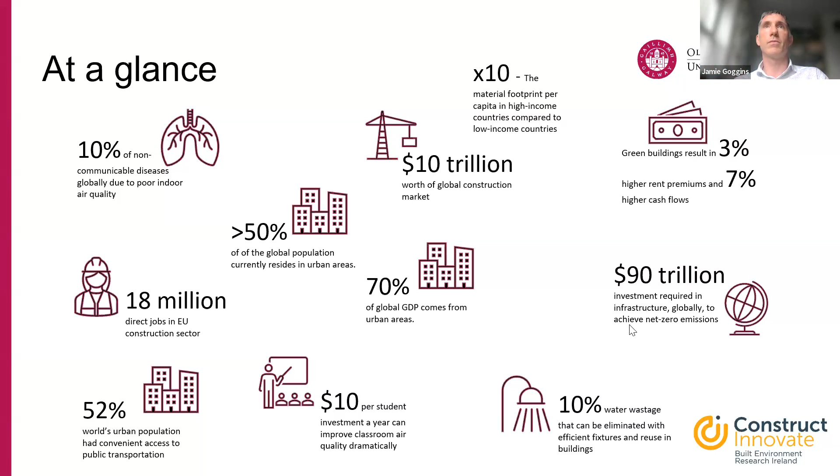Many companies, such as Arup, are telling their own stories through the SDGs. If you look at the Arup sustainability report, you can see how they're showcasing some of the projects they've done, relating them to the SDGs, with the SDG logo shown alongside the specific targets underneath.

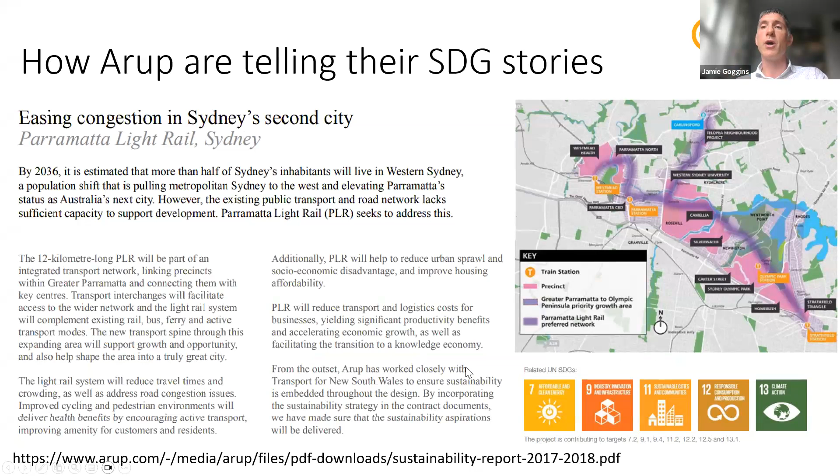It's important that we pick out the targets we're trying to achieve, and that's why I showed you earlier how you might go onto the website to find those targets.

So this is what I think you could think about for your projects, and how your project might be supporting the Sustainable Development Goals.

If I take an example of tidal energy - we do a lot of research in tidal energy within our group - the main Sustainable Development Goal that would support is affordable and clean energy. If we deploy a tidal device or a river device, say in the Zambezi River, we get clean energy because there's no fossil fuels associated with it, but also it's affordable and reliable, since we can predict the energy we're going to get.

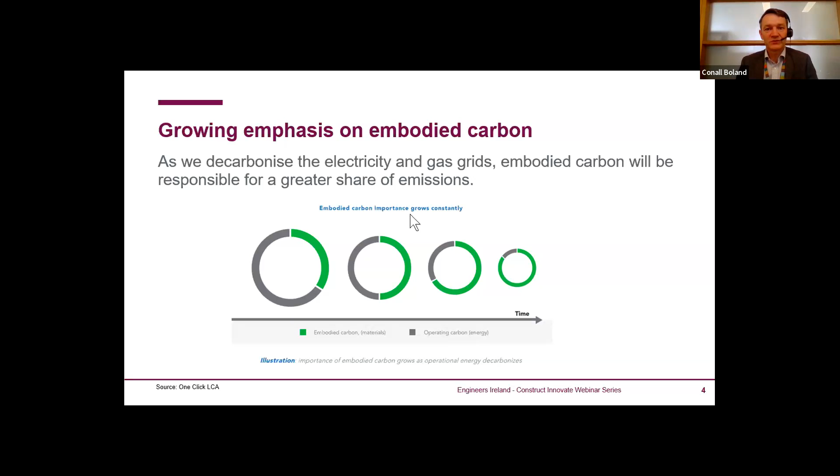So we've been very good at building solutions to meet today's needs, as Jamie pointed out, and we've been very much focused on the cost and safety and upfront effort - making something work that's durable, reliable, and fit for purpose. But we've got to start thinking about the operational phase a lot more and the end of life phase.

So embodied carbon can be broken down into what's called upfront carbon. That's got to do with the raw material supply, the transport, the manufacturing, transport from the factories to the construction site, and the construction effort. And when you add all that up, that's the upfront embodied carbon in a project, which is often really, really significant.

But then as well as the operational phase - keeping the lights on and keeping the equipment running - there's also an embodied carbon in the use stage. So if a building is going to last 50 years, or a bridge is going to last 100 years, in that time what do we need to replace? What do we need to repair? Are we swapping in and out windows?

Are we swapping in and out pumps? And then you start to think about how long they're going to last, what the frequency is, and to do a full life cycle assessment, you look through that operational phase and you look at what the embodied carbon will be during operation. And it doesn't stop there.

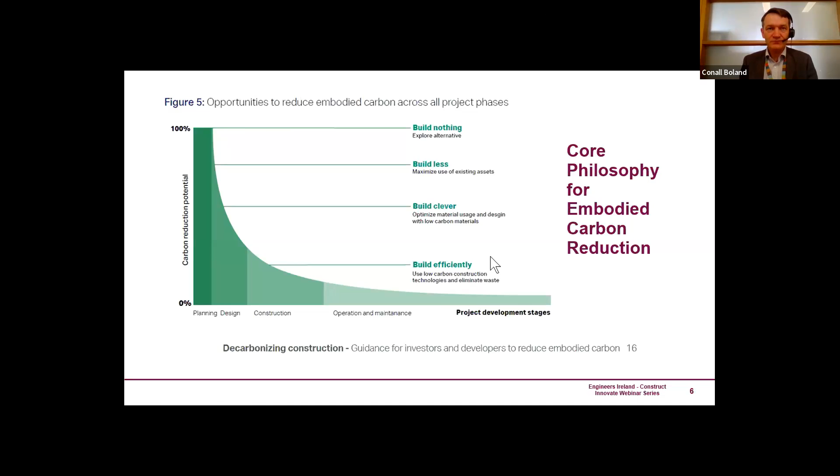So the design given here, when we came to the project in a joint venture with Wills Construction, was to build a concrete bridge over these cables. It's in bad ground conditions, so build a concrete bridge to make sure there's no settlement and the cables are safe. So the design team sat down with the client, sat down with Wills Brothers and said, is there an alternative to using a concrete bridge in this situation?

And they came back with a number of alternatives and spoke with the regulator, Scottish Power Energy Networks. In the end, the solution was not to build a concrete bridge, but to build a structure from crates made from recycled plastic. These are stormwater attenuation crates, normally used for a different purpose, but here used in a structural context. They can be built more or less by hand, very low construction effort, recycled plastic content, and a much, much lower carbon footprint than the concrete option.

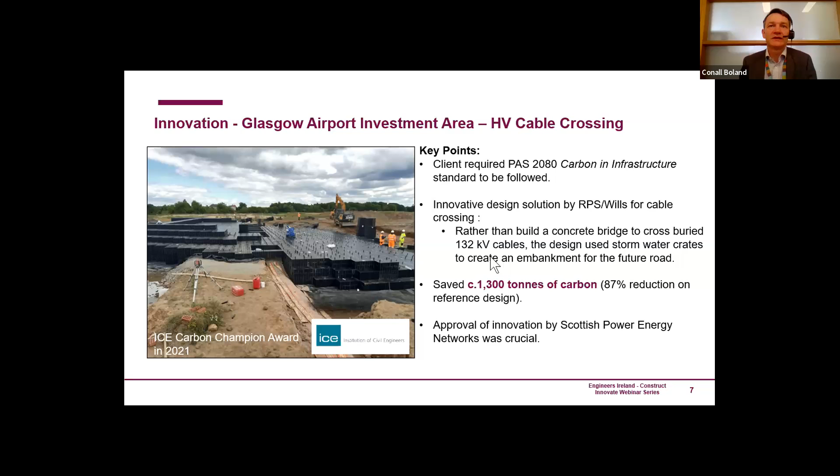So in that one design change alone, there was an 87% reduction compared to the reference design, and that saved 1,300 tons of carbon. Critical to this was innovative thinking, but also that the regulator - equivalent of EirGrid - was open to this as a solution, and your client has to be open to it, and your regulators have to be open to these as solutions. That solution was designed in our Galway office by the geotechnical team, and it won a Carbon Champion Award in 2021.

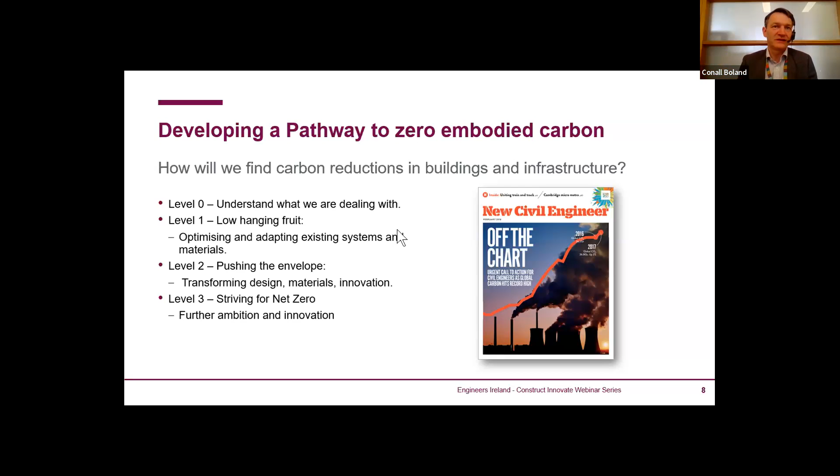So in terms of where the design industry and consulting industry is in terms of embodied carbon reduction, this would be my own take on where we're at and where we need to push to in the next 5-10 years. I've set it out in 4 levels. The first level is just understanding where we are and whether we've got a decent baseline. Then you move on to optimizing and adapting existing systems and materials, and then pushing the envelope with transformative design, materials and innovation. The final step will be striving for net zero, which will need another push in ambition and innovation.

So what do we mean by level 0? First of all, it's understanding the baseline and the carbon footprint of a project. And if anyone says to you they know all this already, I think they're telling lies, because we're only a short number of years into this process. But if you do a carbon life cycle assessment, you start to understand the footprint, where the carbon is going to happen in this project. Then you can identify the hotspots - where's the most carbon happening - and that's where you focus your effort. You can also do benchmarking.

So the more data we have, we can compare it to other projects. Are we higher or lower? Are they achieving more in other countries? Do we achieve more or less on the last project? And then you start to put your team's effort together, working as a team to reduce the overall footprint.

So it's becoming increasingly important even to get planning approval for projects now. There's much more focus on climate and understanding the climate impacts and addressing the climate impacts.

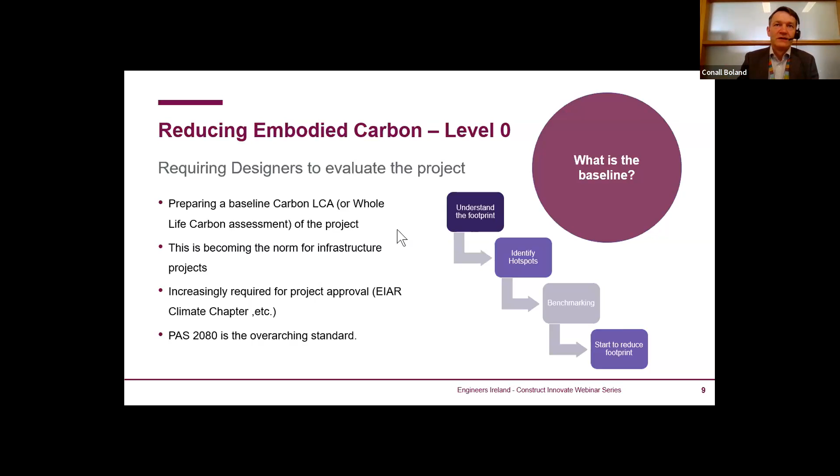So this is really good. We can compare projects across countries. We can compare elements of different projects from one to the other, and we can work really hard on benchmarking in this.

So a project where we applied this, probably going back about 4 years at this stage, Kerdiffstown landfill in County Kildare, just outside Naas, was a very bad news story, a badly operated private landfill that the state had to take over and remediate.

And Kildare County Council was given the job of implementing that on behalf of the state. And they said to us, look, we want to push sustainability hard in this project. We want zero waste moving off site if we can, so big emphasis on circular economy.

But on the carbon, we took upon ourselves to do a life cycle assessment of the detailed design. So we began to understand where the carbon would be in the construction and operation.

And then when we went to the tendering stage, we challenged the tendering contractors to do their own carbon assessment and to tell us whether they were going to make carbon reductions. And that was a factor in which contract was picked.

Then we moved on to the construction stage, and every month on this project there is a monthly update on what the carbon expenditure is and what categories it's coming in. So we can now track the as-built carbon against the proposal during the design stage.

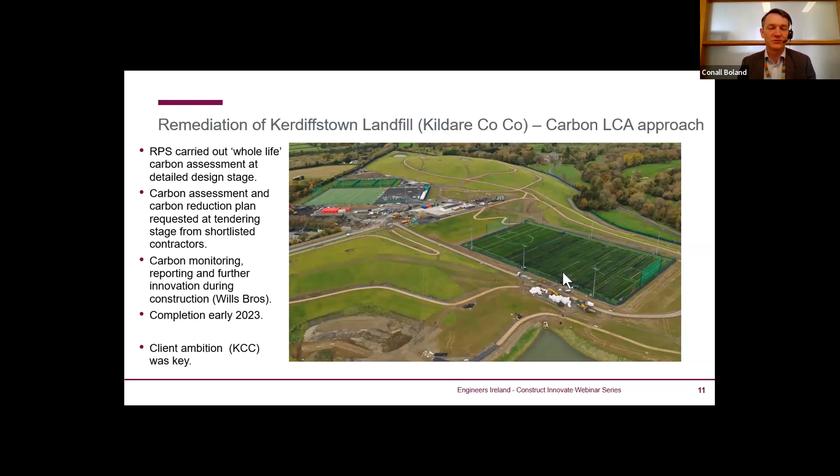So really interesting, and this project has come to completion, and we're going to have a lot of data that we can share and move on to the next project. So again, the client ambition here from Kildare County Council was key. They gave us the license to push this ahead.

And the kind of data we got in that project, this is an output from the life cycle assessment. So we can see at what stage in the project the carbon is being felt. So the A1 to A3, the products, accounted for more than 50%, the transport about 5%, and so on.

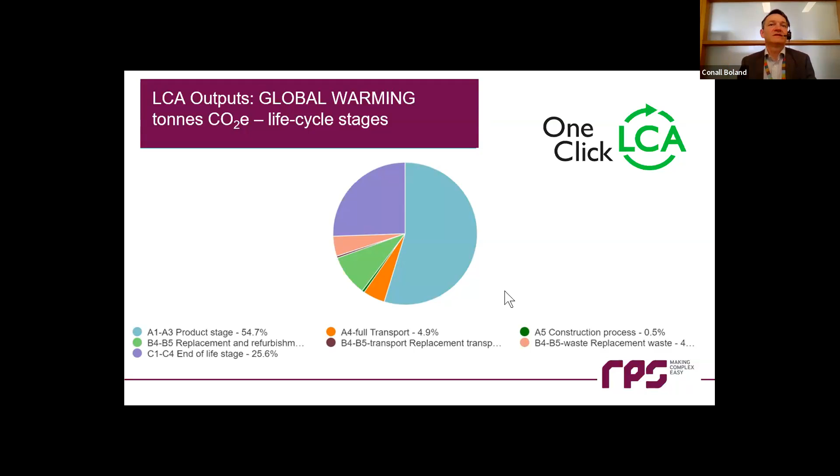Construction processes are relatively small, but maybe less than a quarter there in the refurbishment phase of the project, and then quite a lot in the end of life stage of the project, so 25%.

And when I talked about hotspots and focusing on hotspots, here's an example of a graphic illustration of what the hotspots were in the design that we did. So plastic membranes, all the liners for safety, for trapping gas, trapping leachate, that was the biggest hotspot there. But then asphalt, soil and gravel, pipes, and plastic floors were the next five categories.

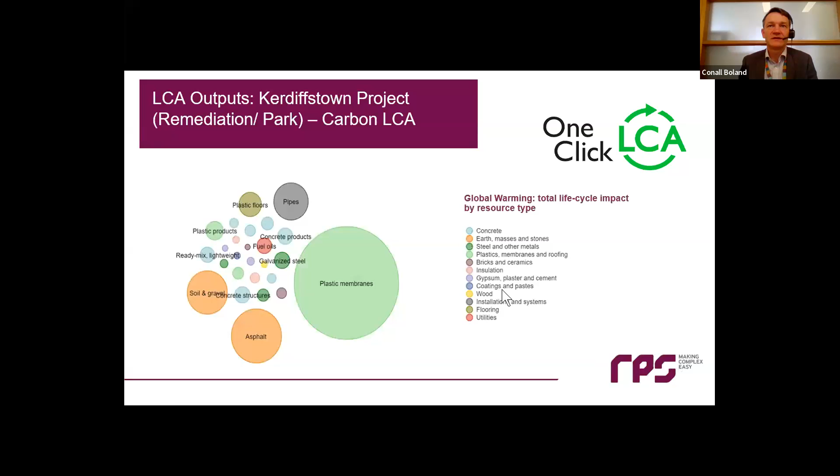So straight away, your design team can figure out, let's focus our effort on these and see what we can do. So moving on to level 1 and reducing embodied carbon.

The next area, a lot of people probably on the call are working on this already. A lot of consultants work on this, probably students learning about this. There are gains to be made in design efficiency, whether it's structural design of buildings, bridges, or foundation design.

We're probably optimizing for safety. We probably have room to re-examine factors of safety, concrete specifications, steel specifications, and look for that extra gain on carbon without reducing any of the other performance of the infrastructure.

When it comes to material selection, we have to look more and be more ambitious on choosing low carbon concrete and low carbon steel and other materials, like the plastic liners in the last project. Looking at things like internal finishes, are they needed or could they be left out?

Moving on then in the construction process, a lot of the bigger contractors are moving to electrification of plants. They're looking at alternative fuels.

There's a lot of movement in terms of off-site construction and modern methods of construction, where building or infrastructure components are manufactured in a controlled environment. Technically this should mean more efficiency, less waste, and a shorter construction period. Digital design tools can help in this optimization, and the first 20 or 30% of carbon reduction need not necessarily increase costs.

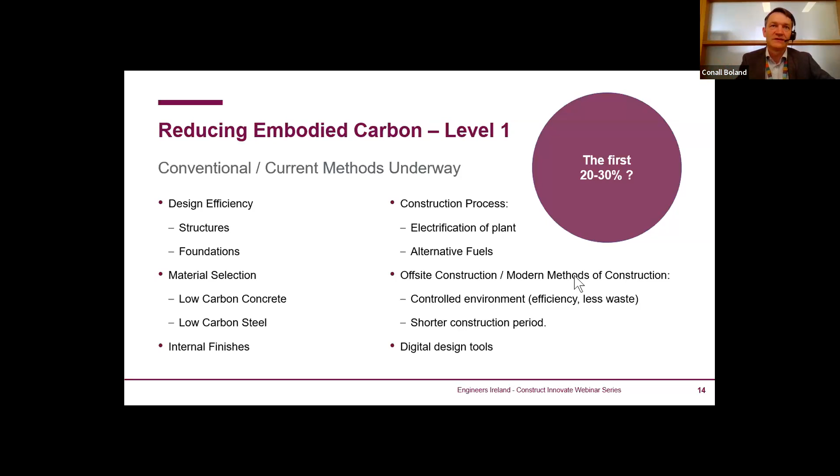A case study from the UK, published by the UK Green Building Council, looked at the infrastructure for a housing development of 750 houses in Cambridgeshire. They challenged the baseline design and found that for just a 0.6% increase in cost, a 20% decrease in carbon could be achieved. That came from things like omitting drains and using swales, more nature-based solutions, reducing parking areas, footpath dimensions and locations, and curbs. It doesn't necessarily mean cutting corners on quality, but it means being prepared to embrace some new changes in design.

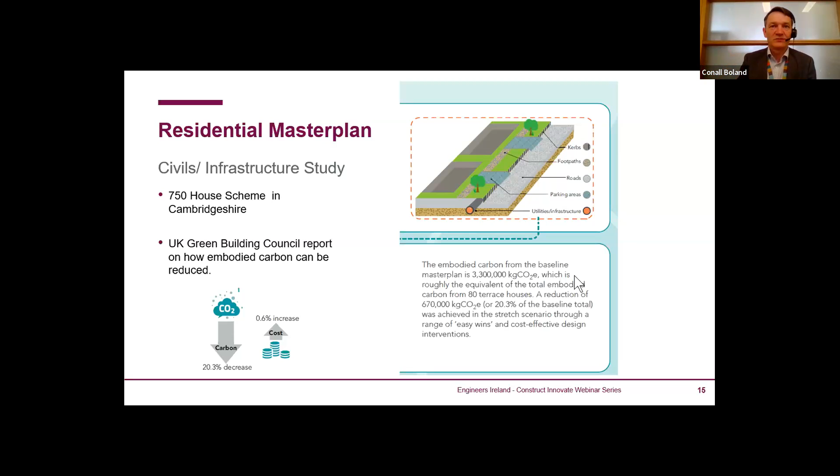So that's 20% achieved, pretty much cost neutral. The next stage is going to get harder. The next 20 to 30% reduction in carbon that we need to achieve means we have to look towards innovation, novel building materials, new building systems, and biogenic materials.

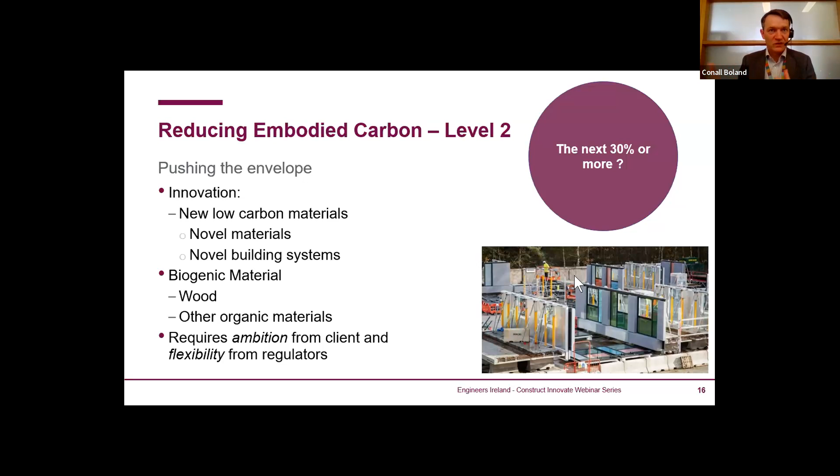Wood is one, but there are other organic materials we can tap into. What this means is getting out of our comfort zone - more ambition from the client to push us in this direction, and more flexibility from the regulators. We're going to get into unfamiliar territory here, and that creates a challenge for everyone, but this is where we have to take things.

An example here I like from the UK, from the University of Bath research team - they're using concrete for floors and buildings, but in a new form. They're looking at a thin shell vaulted alternative as a way to reduce the thickness and material use, and you can almost physically see the reduction in carbon happening in that project. That's the kind of innovation that pushes us into more challenging design, more testing, more demonstrating that it's a safe technology, and partnership between construction companies, research labs, and material suppliers to make things like that happen.

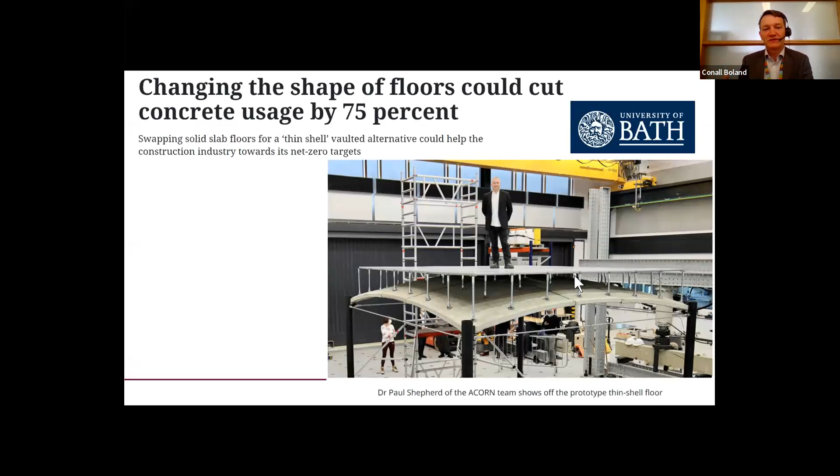You've probably heard of cross-laminated timber as an approach - using structural timber to reduce the need for concrete and structural steel in conventional buildings, going above one or two stories into taller buildings as well. There's fantastic potential in this, with very good case studies internationally. Obviously there's a bit of a journey to go, and we don't manufacture CLT in Ireland at this stage, but there's no reason we can't push in that direction.

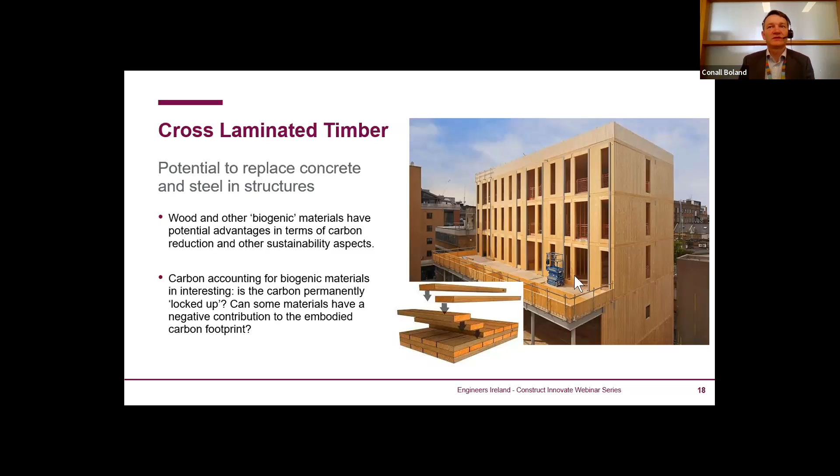Wood and other biogenic materials potentially can lock up carbon - there's carbon in that structure, but it was taken from the atmosphere to create the material in the first place. So the accounting of this, and how we look at the end of life of these kind of structures, is very interesting. Some researchers would say you can even take a building like this to be carbon negative. I'm not so sure that's true, but it should definitely have a lower life cycle carbon cost, particularly if you can do something with the materials at the end of the design life of the building.

What we've got to do is start thinking about infrastructure and buildings and the built environment more in terms of something we can recycle, reuse, and repurpose. By and large, if you get things right on circular economy, you're also inherently going to be reducing your embodied carbon over the life cycle, and that's important to remember. Our challenge as an engineering fraternity for infrastructure is to start applying this thinking in our designs, and to try and live more Lego-like lives - that's another good image to bring with you from this presentation.

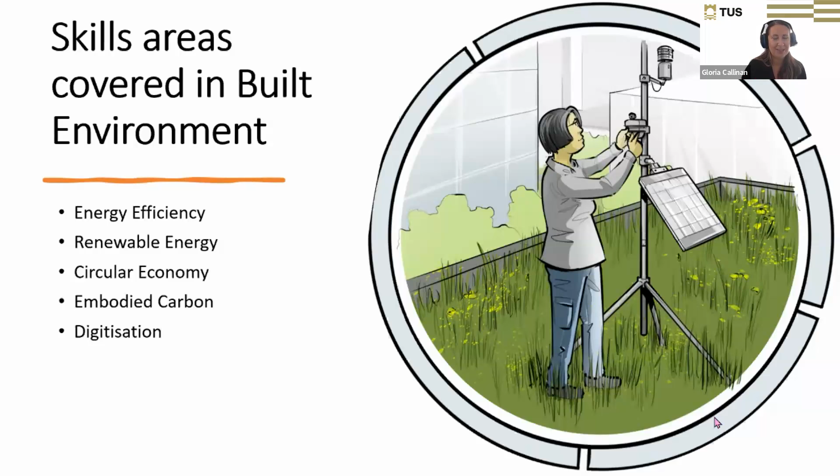Again, just in context, I mentioned that we have an Irish consortium led by ourselves and TUS. Our partners in the project are the Irish Green Building Council, who are also partners in Construct Innovate, and I'm sure no strangers to anyone here. The Construction Industry Federation are a leading member of our consortium, and we need that support from industry and the input of industry in order to determine what are the best skills and the best way to achieve the skills to meet our targets.

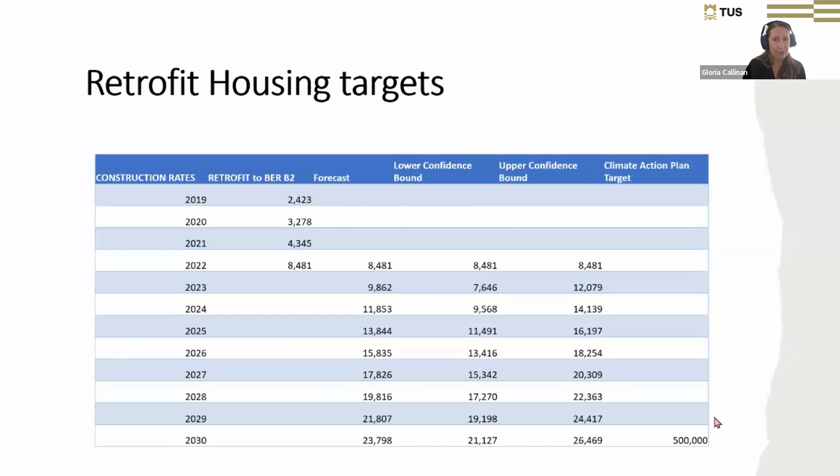So that's on target as far as we can tell. In terms of the next slide, which is retrofit, these are all quite small, but in terms of reaching the climate action target of 500,000 units retrofitted by 2030, we foresee a lot of challenges with that. Moving on to the next slide.

Architects, the idea of breaking it down into professionals and workers - across the entire value chain we have shortages, and we've projected, literally down to, I think it's 73,000 workers that we're short, and that is taking into account the trajectory where we're attracting more people into the built environment in the construction sector. We're trying to increase diversity in construction, and we're working with schools. So taking into account what's already happening, we're still projecting a huge shortfall.

So just moving on to that then, please, Sinead. Yeah, and sorry, just to mention before we come to that, a huge amount of skills gaps as well, and upskilling that is needed right across every single role, and new roles that are needed as well. So just moving on.